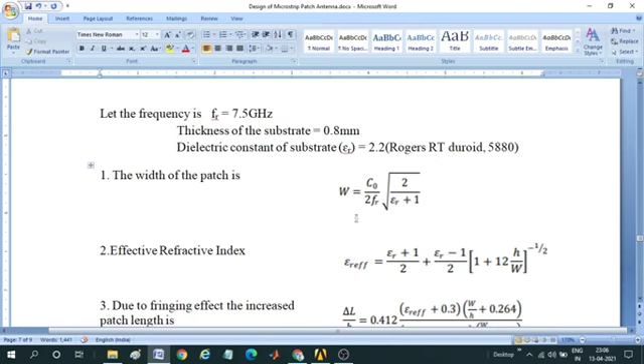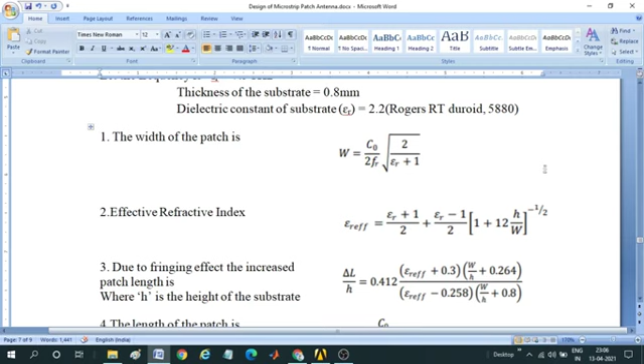Then for the calculations, we require the width, length of the patch as well as for the ground plane. So, width we can calculate by this equation where W equals C0 by 2 FR square root of 2 by epsilon R plus 1. Then as there is the change in refractive index immediately above the patch, we have an effective refractive index.

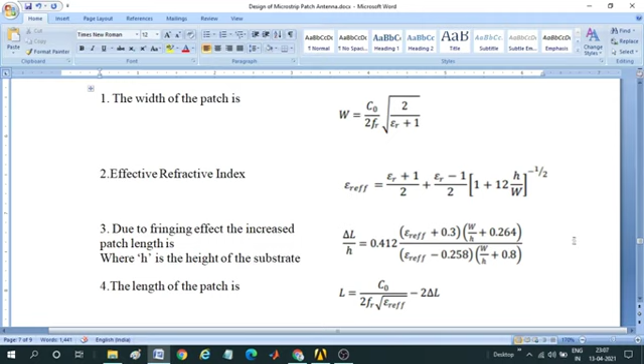So, that can be evaluated from this expression, followed by, because of the fringing fields that occur due to the patch as well as the ground plane, we have a small shift in length, delta L, which is evaluated by this expression. So, the length of the patch will now be defined by subtracting this delta L. Similarly, the length and width of ground planes are defined by these equations.

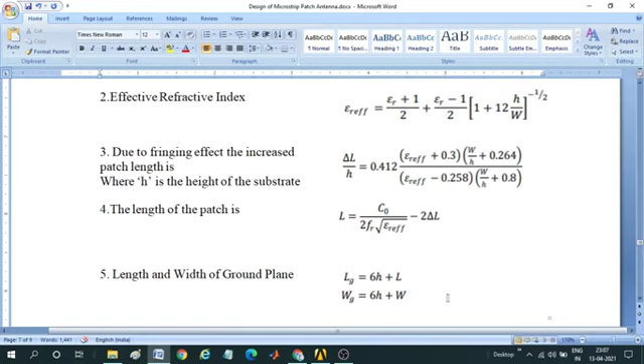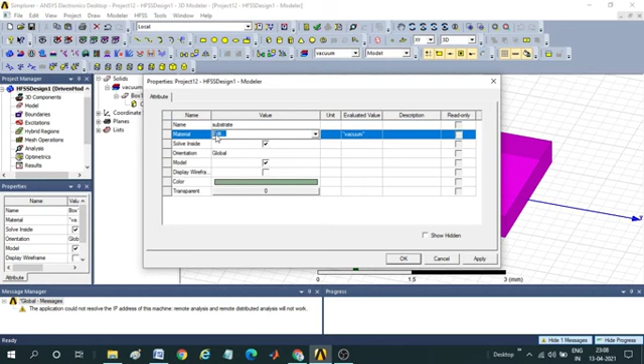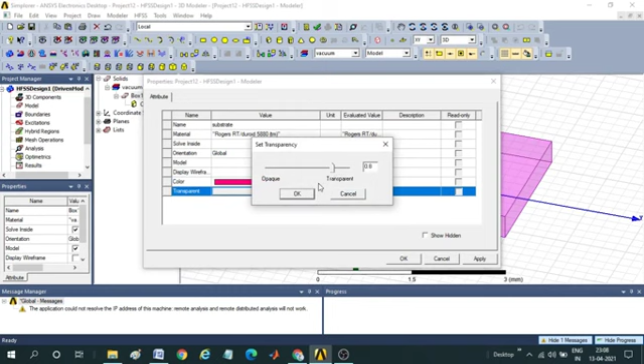So first let us consider a box for substrate. So this box I am taking as substrate. Here I assign it as Rogers RT Duroid 5880. Here you can see the epsilon R is 2.2. Then give OK. Give some color as well as assign some transparency level so that we can visualize where the patch as well as ground are represented.

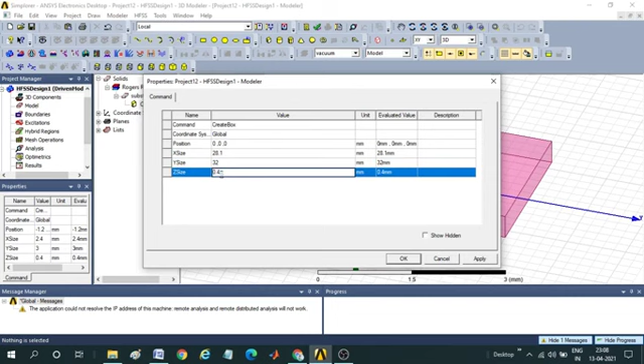So in the create box, the position I am going to choose as 0, 0, 0. The X size is 28.1 millimeters, Y size is 32 millimeter, and the Z size is 0.8 millimeter, and then press OK. Now press Ctrl D. Now you can see the substrate is aligned along the XY plane with the height along Z.

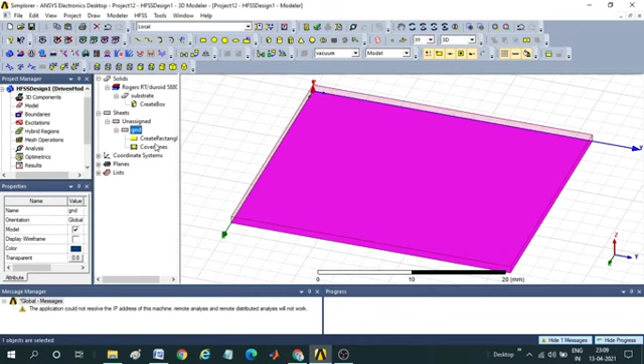Now take a rectangle, rename it as ground, assign some other color as well as transparency level. Now go to create rectangle. The position is 0, 0, 0 and X size is 28.1 millimeter, Y size is 32 millimeter. Now click on draw rectangle,

rename it as patch, assign some other color as well as set some transparency level. Now for this patch, previously we calculated the dimensions as 12.45 millimeters and 16 millimeters. So here I am giving the position as 7.825, 8, 0.8 because it has to be represented with a shift along the x direction as well as y direction, and the x size becomes 12.45, y becomes 16. Give OK. Now you can see it is aligned here.

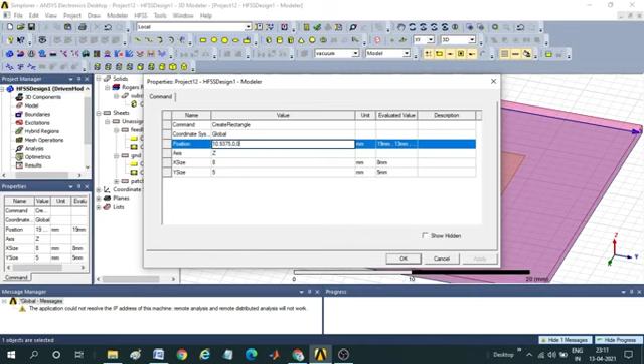Now take one more rectangle, draw it, rename it as feed line, assign some color as well as some transparency level. Now for this feed line, give the values as 10.9375, 0, 0.8. Now the X size is 2.46 and Y size is 8 millimeter.

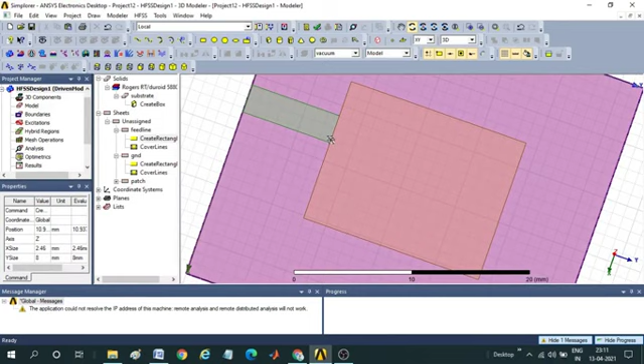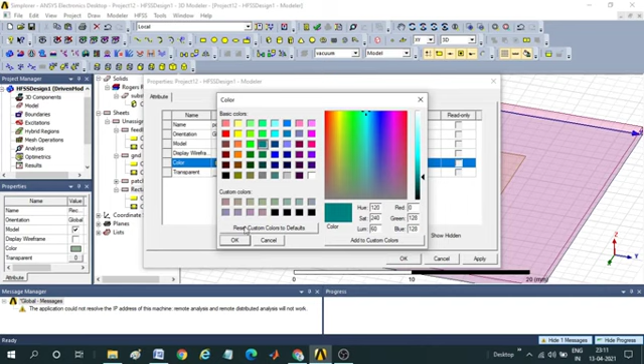So you can see it is actually an offset feed. It is not aligned exactly at the center. It is with an offset along the X direction. Let us keep it normal. Press escape. Again go to draw rectangle. Click somewhere. Rename it as port A. Give some other color. Set some transparency level.

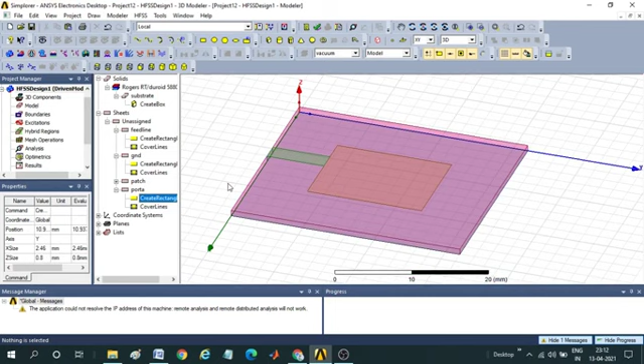Now create the dimensions as 10.9375, 0, 0, and it must be aligned along the Y direction. Again just change the value of X as 2.46 and the height as 0.8 millimeter. You can see it has been aligned along the XZ plane. Now we have given all.

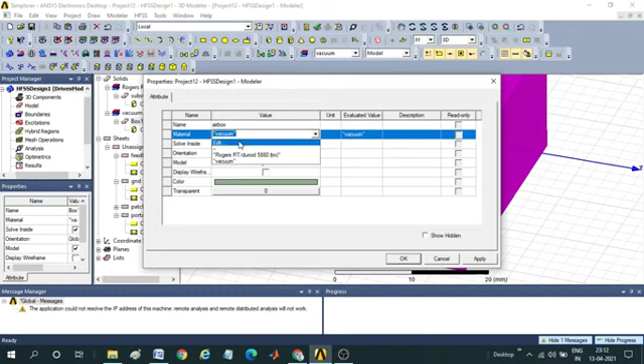After that we need to give the air box. Click somewhere, rename it as air box. We can leave it as vacuum, but still, as immediately surrounding the antenna it represents air, so I am giving it as air. Set some color and transparency level.

Now go to air box. Here -5, -5, -5.794 millimeters. X size is 33.1 millimeter. Y size is 45 millimeter and Z size is

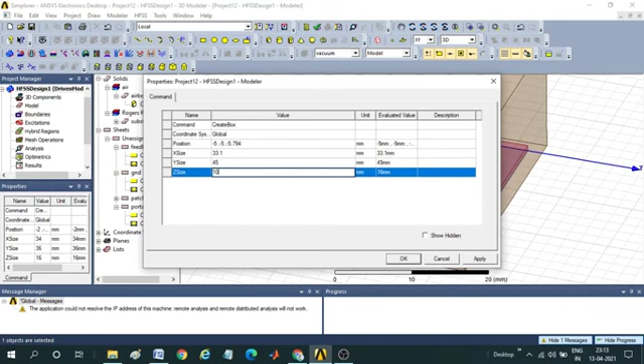10.794 millimeter. I am choosing this dimension so that the patch along with the substrate and ground are at almost a height above the base of air box, so that the evaluation of the finite element method will be easier. So now we have completed the first task of developing the solids.

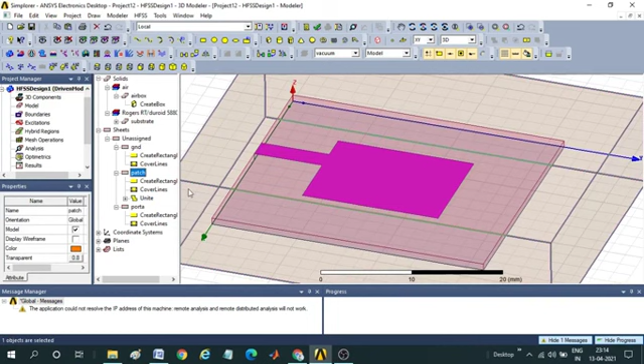Now let us take patch and feed line. By pressing Ctrl, select both, go to edit, go to Boolean, unite. So once you unite them, if I click on it, it shows as a single structure. Now let me rotate it so that it will be easier for me to indicate the port. So now let us zoom it, press escape, go to view or edit, hide air box, give done.

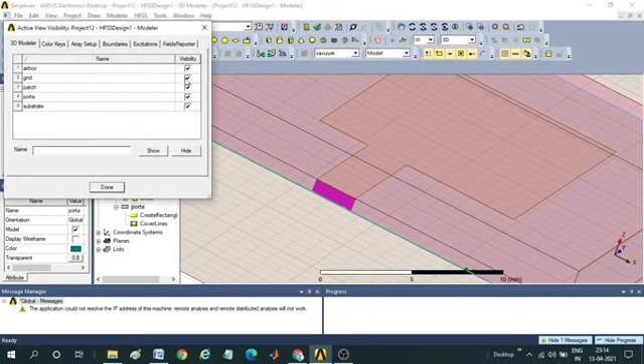Now right click on port A, assign excitation, lumped port, give next, because we want to match it for 50 ohms since it is a strip line. Then once it is defined, click finish. Now go to ground, assign boundary, perfect E. Similar way, go to patch, assign boundary, perfect E.

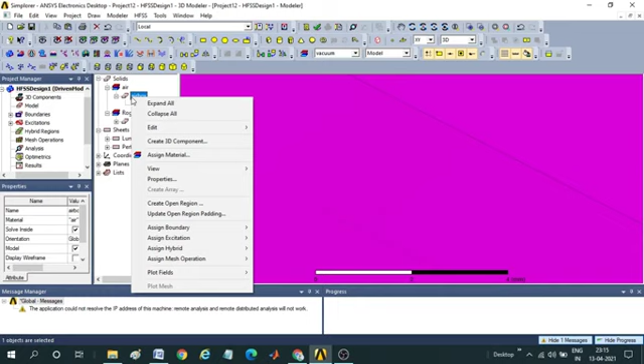Go to air box. Since the entire antenna is held within the air box without touching the boundaries, I can assign directly. So assign boundary, radiation. So under boundaries you need to see perfect E1 for ground plane, perfect E2 for patch and radiation for air box.

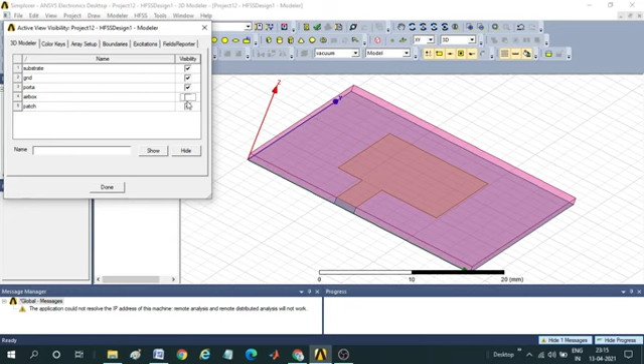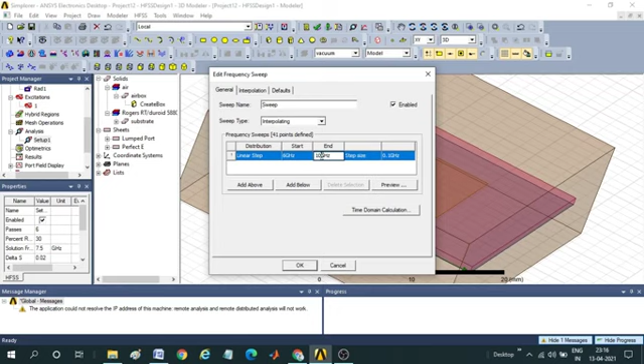Okay, so once this is done, now right click on analysis, add solution setup. We have taken the solution frequency to be 7.5 gigahertz. Then click on plus symbol, right click on setup, add frequency sweep. So here since it is 7.5 gigahertz, now I am changing this to 6 to 9 gigahertz. Give OK.

Then go to radiation, right click, insert far field setup, infinite sphere. Here I change the theta value to 360. Then give OK. Now analyze all. Now save it as strip fed patch.

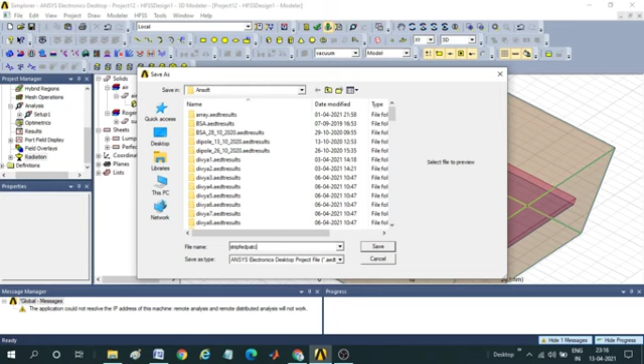Here I had chosen offset feed, but usually we can give center feed or inset feed. Those details we shall see in next videos. Usually for projects, the basic antenna that is chosen is a rectangular patch antenna, and upon it the developments are made. So for any starter, you can have this as the basic design, and you can go ahead changing the designs. You can have many options by using unite and subtract. There you can create as many models as possible.

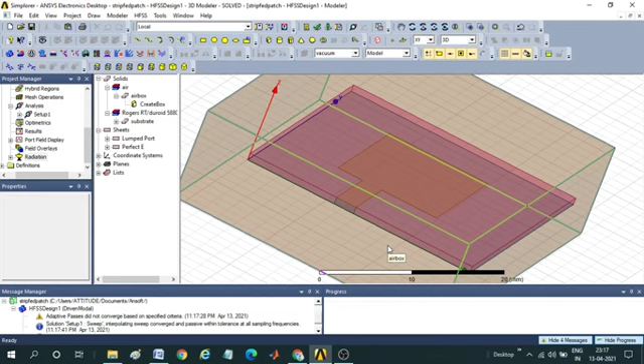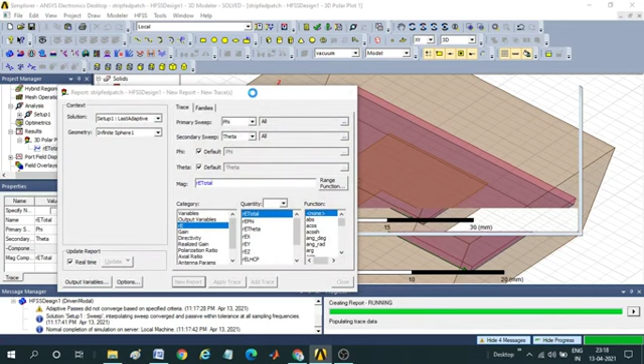So since I had given only 0.1 gigahertz, the results are available now. Go to HFSS, results, far field report, 3D polar plot. So this is the radial component of electric field. You can see a balloon type structure is obtained, and the value is around 1.411 into 10 to power 4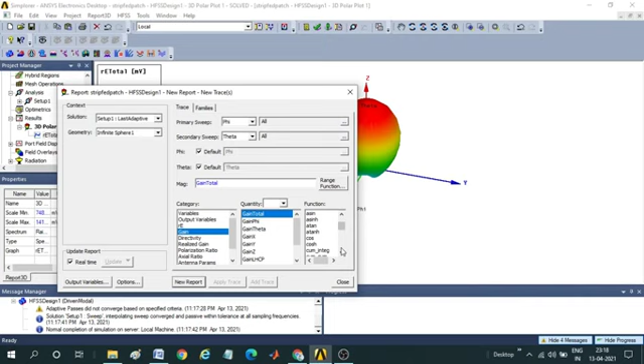millivolt. Go to HFSS, results, create far field report, 3D polar plot, click on gain in terms of dB, new report, then give close. So here 6.4936 dB of gain is available.

If in any case you are getting a negative gain, it means that the width or length of the feed line has to be changed. Usually we change the width, then again the length of the patch can be adjusted in order to have the resonant frequency. Once the impedance match as well as resonance is occurring, then you will get a positive gain.

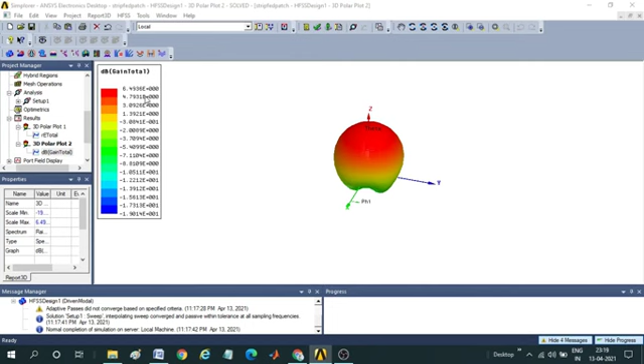Then go to HFSS, results, modal solution data report, create rectangular plot, S11 in dB, which is nothing but return loss. So actually it has to resonate at 7.5 gigahertz. It is resonating at 7.3 gigahertz. So the length has to be adjusted slightly. But if you see the margin, say I go to add marker, the value is minus 11.0877 dB, which is actually an acceptable value.

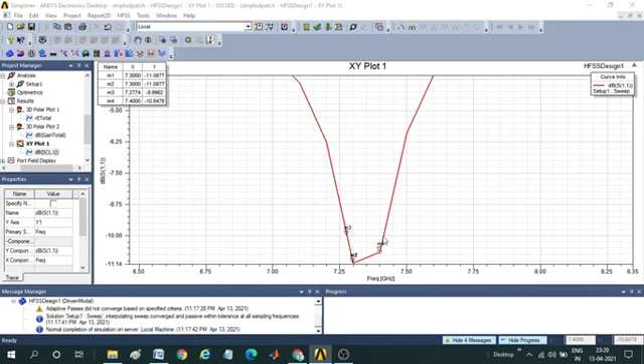Suppose if you are asked to find the return loss bandwidth, then you need to click at minus 10 dB. Click at minus 10 dB on both sides. So I bring it to normal. Now press escape. You can select the other components and delete them.

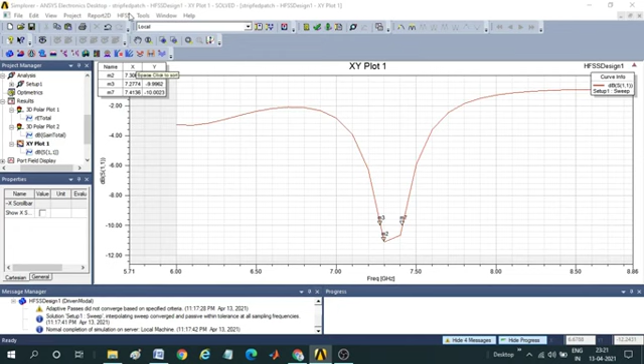So then the return loss bandwidth will be 7.4136 gigahertz minus 7.2774 gigahertz. So if you calculate the value, it will come around 136.2 megahertz. That represents the bandwidth. Then again go to HFSS results, modal solution data report, rectangular plot, click on VSWR.

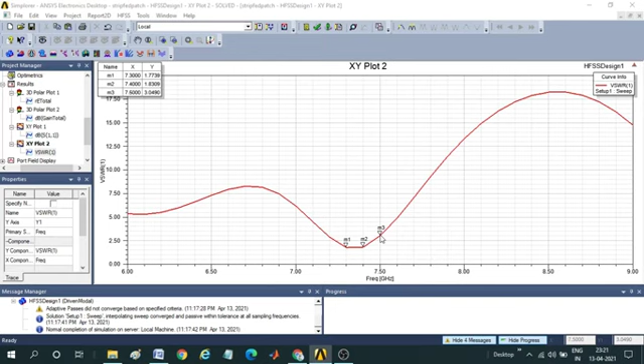So here also the resonant frequency is coming at 7.3 or even at 7.4, but actually at 7.5 it is crossing the limits as per the design. So slight adjustments are required. You can see at 7.3 gigahertz it is 1.7739 and at 7.4 gigahertz it is 1.83. Hope this has given an insight to microstrip patch antenna.